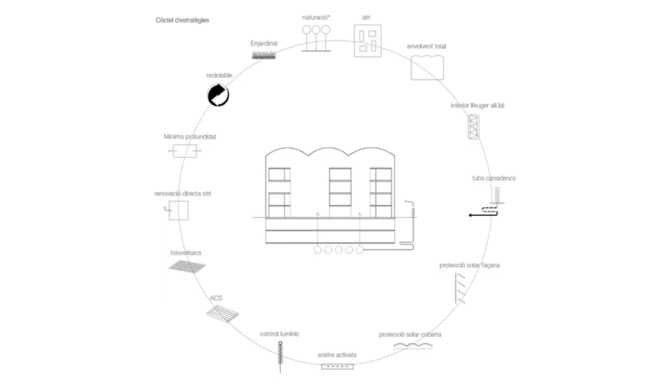Why were we lucky? Because the budget of our clients was too low. It was not enough to use efficient, sophisticated technological systems to provide sustainable and efficient comfort. Our fees were too low to get sophisticated simulations and develop sustainable strategies in our projects. So, thanks to that problem with money, the only way to develop sustainable strategies was by using specific architectonical strategy, by being more sustainable just through architecture, not by using machines or sophisticated systems or simulations.

Now, in the buildings we are trying to develop today, we really need simulation. But at that moment, the only way to be responsible in terms of sustainability was by using specific architectonical strategies. That's what we think has helped us arrive at this point, to understand the problems with a certain approach to architecture. I repeat, extraordinary examples, lots of them, but not with enough consciousness about how we have to be aware of natural and contextual conditions.

For example, strategies based on the use of the building. The first strategy in terms of sustainability is not about the object, what is more or less sustainable. What is more or less sustainable is how we use the object. In terms of architecture, that means understanding that not all spaces need the same temperature, the same level of comfort. Not all activities need the same kind of comfort conditions.

Of course, it was also at that time that we began to use thick materials, biospherical materials. That, again, is a completely specific architectonical decision. Or by introducing that kind of intermediate space that you know well, because our reference was basically French. That intermediate space is not only interesting in terms of passive strategies, but also in terms of how we use a house, a public facility, or a building.

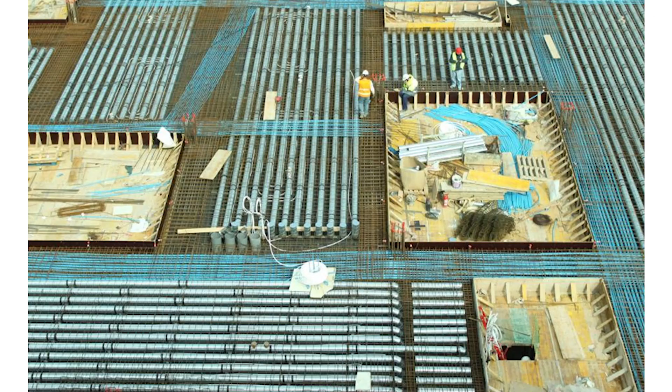And even when an active system is necessary, when we need a climate system to provide the extra comfort that passive strategies can't achieve, from that moment we've always been trying to put those systems into the most permanent part of architecture, which is the structure of the building. So even when the active system is necessary, we try to plug it into that specific and permanent part of the building.

So, in our history, let's say, this has been our process to understand that we need to recover that relation with nature, so that if it's not possible to come back to the pre-fossil fuel moment, maybe we can be at that ecotech stage we know, in order to be a little less in a moment of crisis with ecology.

And that idea is what we call reciprocal architecture. It means we try to provide not comfort, but to project the experience of people. We really believe this experience is far more intense, more convincing, more extraordinary when it's the result of collaboration between architectonical decisions and natural conditions. When your experience is the result of this combination, it suddenly becomes something extraordinary.

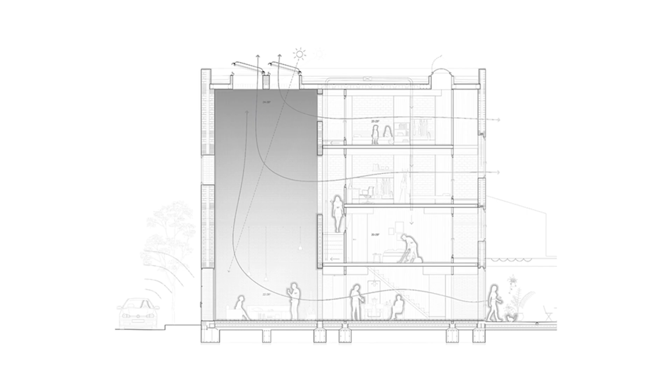So quite a simple thermodynamic concept, else. But from that point it becomes sometimes extraordinary, because it's in this convective space, this thermodynamical space, that combines not only the sun gains and the natural ventilation, but a lot of inertial mass, a lot of mass that helps. In Barcelona this is very clear. I suppose that in Marseille it's quite close.

When we live close to the sea, it's quite simple to explain that thermodynamical concept: the sea helps us make softer the difference between temperatures, summer and winter, night and day, because during summertime the energy of the sun is stored in the sea and comes back to the city during winter. That's a basic concept in Mediterranean climate that helps us a lot, and it's always in our projects.

Doesn't matter if it's a private house or a public building. This combination of huge wide walls with natural ventilation, convective and so on, produces something quite extraordinary, which is the sitting room of this house, the entrance, everything. In fact it's a non-programmed space. It works as a lobby, for parties, for everything.

Another reason for that section was that on the west side there was a very noisy street, lots of cars, so pollution. So the idea to get all the relation with the outside through the sky looked like a very good idea.

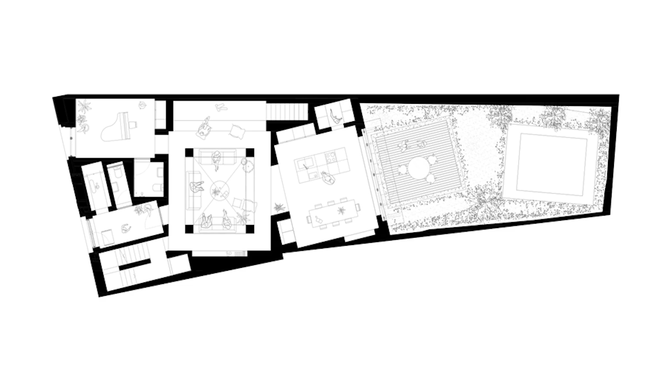Another example of that kind of thermodynamical convective space is this house we've just finished in the middle of Barcelona. I won't go deeper on that—it's just another example of that kind of non-programmed but quite extraordinary space that has these genetics.

It's the reason why the house performs like it performs, why the comfort is like it is, based in that kind of natural comfort. When we are in that kind of spaces, we have the sensation that they're more convincing, because all the attributes of the experience are placed in that very permanent part of architecture. It's something really common in all our projects, trying to put the maximum number of attributes into defining the whole idea of experience.

The really beautiful house is an example of the same idea: a very vertical space getting sun gains from the top and producing natural ventilation. But at the same time, what we're happy about is that the final result is something quite extraordinary in terms of living.

The porch is another example of that kind of thermodynamical space—a machine that works as a gallery in winter in order to get sun gain, and works as a pure porch, producing, promoting, and intensifying natural ventilation in summer. A house, in that case, for a rich guy who was able to accept that this house has no other sitting room than the porch.

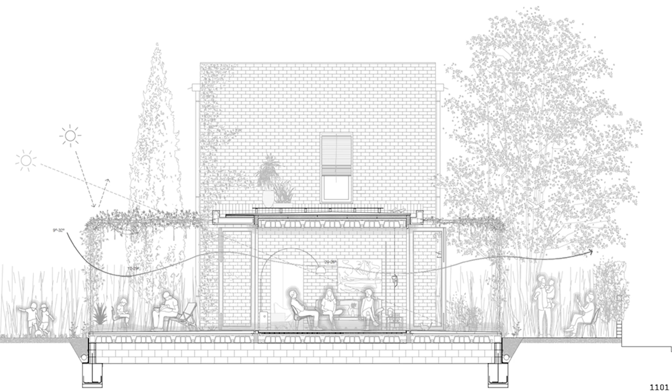The porch is completely open in summer, no TV, nothing else than this porch working as a passive space, completely closed in winter and completely open in summer. It's a beautiful strategy that puts in relation people, experience and context—quite clear in this case, with two gardens on both sides of the porch.

In this house the porch has become not only the sitting room but the whole daily program of the house—the kitchen, the sitting, the dinner, even the studio, even the laundry—surrounding the block of bedrooms, working as a porch that gets open in summer and closed in winter.

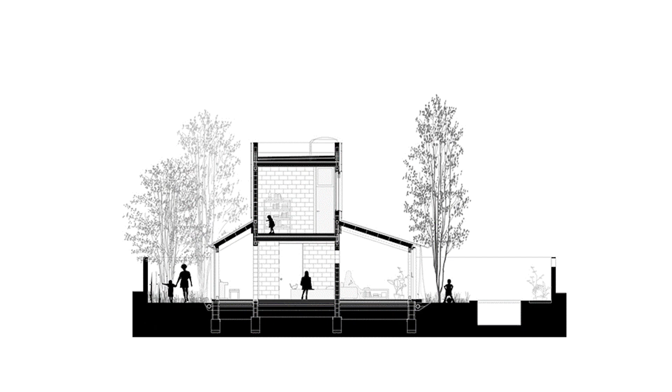Well, we're not ashamed to say that we copy everybody—Lina Bo Bardi, Lacaton Vassal, and others. We're quite proud about that.

Or in this case, this is an office building, but the whole pre-existing building works on the idea of managing the relation between human experience and outside conditions. The pre-existing factory was just improved to get more insulation, to control and introduce new systems of natural ventilation that can be managed and controlled.

From that basic, very simple approach, we defined a little better conditions in order to work in an office way. Because in a factory, that idea of factory-for-office space is quite sexy, since it's such a big, continuous space.

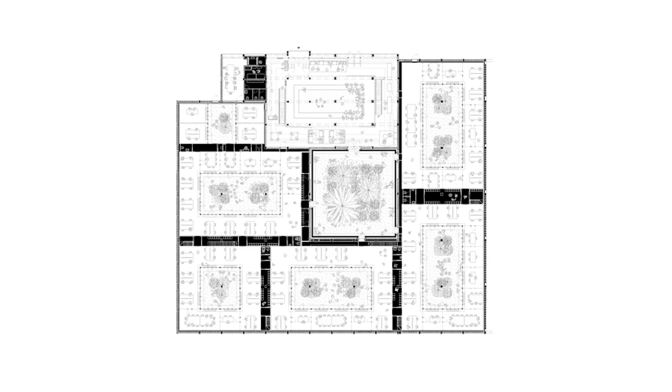The idea of a New York loft is so good that everybody thinks it's easy to put an office space into a factory. It's quite impossible, because the big difference between a factory and an office space is the lack of hierarchy in the factory. In a factory, nothing is organized, nothing is hierarchized, which is cool, incredibly nice. But when you try to put people working in departments with those kinds of synergies, the typical strategy of box-in-box shows up.

Here we tried to put clusters surrounding natural vegetation, where everybody can be a little bit better if necessary, but 75% of the hours of the year the office can be open because the passive conditions in the whole shell are quite good in order to work.

Reciprocal is about work to manage, to collaborate with natural conditions and physical phenomena. That kind of design leads to architectonical decisions in terms of geometry and material, dealing with and managing natural conditions, emphasizing, intensifying, and producing a comfortable experience for people.

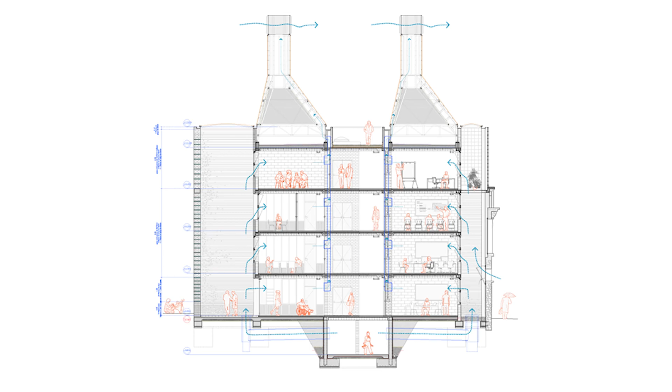Those natural chimneys are able to move 15,000 cubic meters of air per hour. That means the air in every room of the building can be renovated between 9 and 11 times per hour during summertime. Really interesting.

Those sun chimneys are a very interesting idea, especially in our climate, because those very tough thermodynamics that we use, based just on big walls and natural ventilation, when you have a program like this school, not just children but people together in a room...

you know that at least in winter, you don't need any artificial climate system because just 40 people together in a classroom is enough to provide the temperature. So in winter, you just have to manage the minimum renovation in order to not lose the heat you have. In summer it's the opposite.

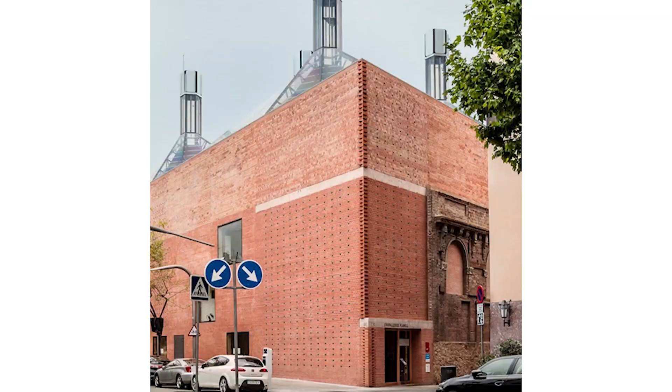You have to take off all the excess energy that people are producing, which the big walls aren't able to store enough. So the funny idea of the sun chimneys, based on the greenhouse effect, is that in winter they work really badly because the sun is lower, with fewer hours of sun. So the sun chimneys in winter hardly move the internal air 2-3 times per hour.

But in summer, in Barcelona, the sun chimneys reach 90 degrees inside because of the greenhouse effect. With 90 degrees, the air rises so fast that it has to be replaced by the inside air. So that idea, based on geometry and material, was the extra challenge of this building: not only to provide comfort through typical passive strategies, but also to move the air based on a natural engine.

Outside there's not only time, there's not only natural conditions and physical phenomena, there's also people, there's also traditions, there are resources, and we also want to give that conscious of context to people in our buildings.

We really believe that when you work in a vernacular context, like it is here, it's a beautiful old town called Ullastret in the Empordà, a beautiful area far away from Barcelona. To be in relation with that kind of heritage in terms of a small village is not just to look like the other buildings. It's to be honest, to look like you really are. Then you really are in synchronicity with what surrounds you.

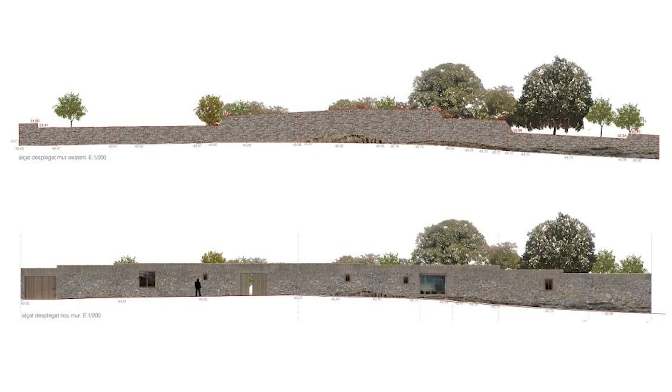For us, the proposal was so clear. We proposed this weekend house as just a large porch attached, linked to the former wall. Because in this village, the norms ask that the facades have to be stone look—we call it crocanti, stones placed one close to the other. So the idea was clear. The client was happy with that beautiful section, a continuous porch attached to the former wall.

But when we went to the council, we got a terrible surprise because the street was too narrow for the cars. It was on the council plan that this beautiful wall had to be demolished, because the street had to be a little bit wider and more comfortable for trucks turning on the corner and so on.

A terrible moment—we are all very intense in the office, so it happens once a week. Something bad really happened: the wall is going down, everything goes bad and so on.

But there's a beautiful sentence in Spanish, something like: after the bad comes the good—no hay mal que por bien no venga. That when something bad happens, after that, something good is coming.

After this really bad news, we came into that research process again, asking the same strategy in terms of heritage. The heritage here is quite nothing—it's just a wall, and after the decision of the council, it's not even a wall, it's just pure stones. So what we asked of this minimum heritage was whether some attributes still remained there in order to be reused, in order to be part of the new performance of the house.

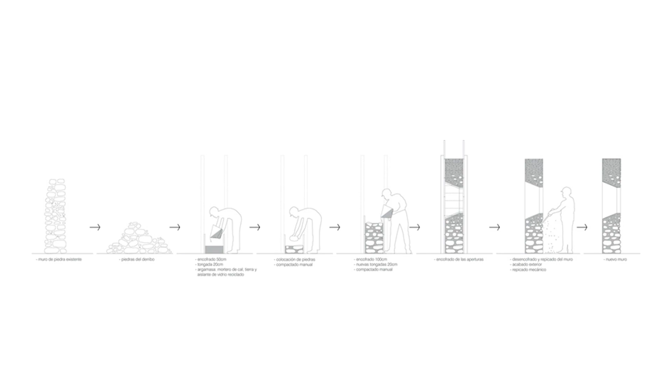So the beauty of the house is that we demolished the wall and we rebuilt the wall. It's just a one-layer house—the walls are just one section. There's no double layers, there's no insulation, there's nothing else than 60 centimeter wide walls. This is possible on that kind of generous plot, assuming huge walls.

So we rebuilt the wall with that traditional technique of rammed earth, but replacing the stones layer by layer—10 centimeter layers, 20 centimeter layers, it depends—reintroducing the walls with lime mortar, not cement mortar, combining the mortar with some of the soil of the plot to get some of the color of the plot. This is possible, I repeat, just in a weekend house.

We are at the edge of the norms, okay? As insulation is illegal, but as a research process it's quite interesting. So you get the insulation by introducing glass balls with insulated air inside. You put some air in the wall, and as the wall is so wide, you get enough insulation—the minimum per norm, okay.

And the final trick is that not all the walls work the same in terms of structure, not all the walls work the same in terms of insulation, so the combination of the mortars is different. The plan with that is the same original project—we didn't change it. It's the same continuous porch, like a domus Toscana, but instead of surrounding an atrium, it surrounds a garden.

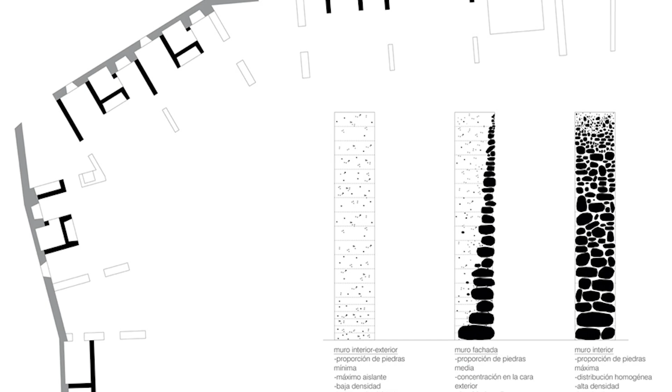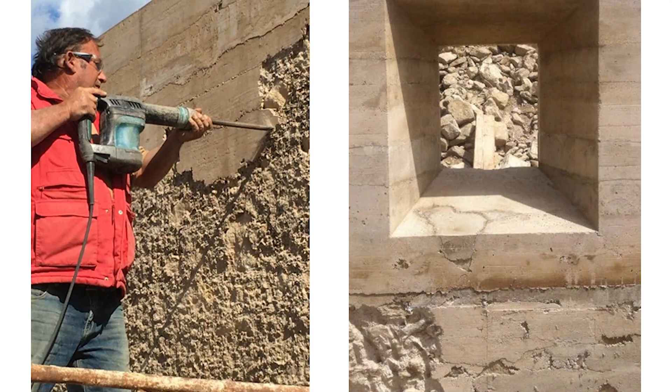It's a continuous series of equal spaces in a perfect section, very well orientated to the south. The good thing about the process is that at the end of construction, when you take off the precast system, we did a kind of digging to the hammer, in order to recover what is asked for per law. As an idea, it's quite beautiful to recover the look of the former stone that was there, 1.5 meters just in front.

So it's completely different from the rest of the houses, because the color of the mortar is not exactly the same, the density of the stone is not exactly the same, but it's completely vernacular. It's completely in fit with the context.

Why? Because the result is so consistent, so convincing, it's clear that it's a result of our research process, quite similar to the process that people did 200 years ago by producing that kind of construction. It's not to simulate, but to be the same — be the same in terms of process.

And this is also context. Context is not just natural conditions. Context is also raw material, techniques, stones. And I think it's important to understand, and you will agree, that we as architects don't experience spaces in a different way than the rest of human beings.

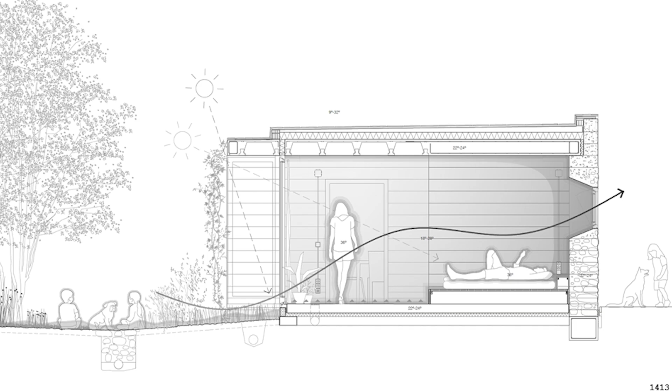It's quite funny, because there's a picture — on the opposite orientation of the house is a pure continuous porch, south orientated. So when they move out on Sunday, they come back to Barcelona and close all the windows. During the week there's enough hours of sun to produce the typical greenhouse effect, so when they come back on Friday in wintertime, the house is quite warm enough.

The funny part is that on Sunday afternoon, they have to move because the house begins to get a little bit cold, but it works in a very natural, comfortable way. In summer, it has to be completely open, especially at night, producing natural ventilation, because these wide, huge walls store the excess energy and need to be ventilated at night to take off this energy, especially at the hours when the outside temperature is better.

This is also something that is not finished, that we are building. In Palma de Mallorca it's a little bit the same story about the relation with — not the vernacular as a look, but the traditions or the context as social resources, material resources.

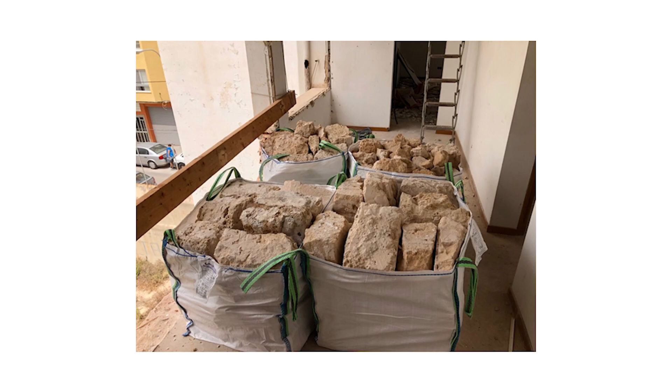So the funny idea here, we won this competition just by presenting an explanation of the process. They were clearly asking for CLT panel construction, timber, wood. They are looking for that because they are so conscious about climate, ecological crisis, and really concerned about it. They really want to use that kind of CLT products, but they don't have CLT produced on the island, so it has to come at least from the Basque Country.

So we presented a different idea, but it looked vernacular enough that they were interested. We won the competition with just a piece of paper with a couple of schemes, and an explanation of the process.

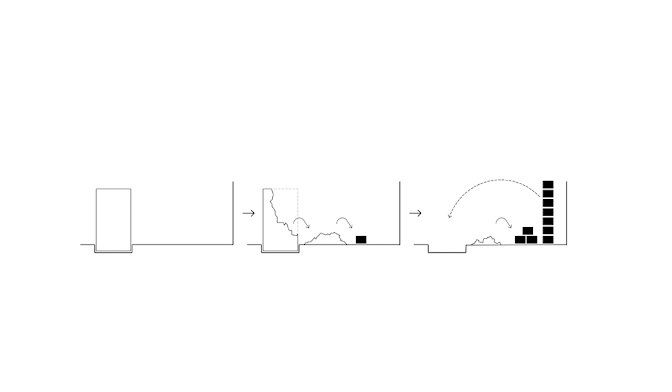In that case, we will demolish the building, and the same guy who demolished the building will build in the same plot that kind of huge blocks with the stone, because we come from the previous house, so we have that idea of massive elements working in pure compression. When you work with lime concrete, with lime mortars, you cannot put steel bars in it because it doesn't mix well. So the previous house has no steel bars inside, and neither does this one.

So we produce those huge blocks. The administration was so proud in the explanation of the competition that they want to use all the surface possible to be built on the field. They are so generous that you can use the excess surface for gardens or for whatever. And we decided to use that extra space into thermal mass, huge walls working in compression, a pure compression way, a little bit Egyptian.

And it works just by pure geometry in section. The CLT panels are here, and the wall comes from 80 centimeters, 70 centimeters, 60 centimeters, 50 centimeters, 40 centimeters. Every layer, just by pure geometry, the CLT panels get support without making any bolted link.

Wow, it's a lot of stuff. Sorry, I'm coming in deep into the project.

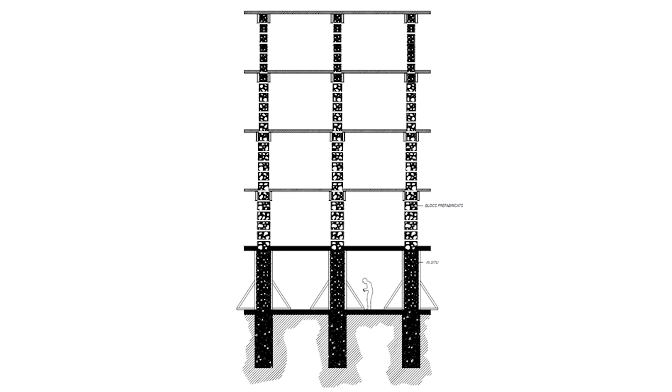But the other discovery we made is that we were not so happy with the first testing process, because when you get that beautiful marès stone, but you precast the block, when you take it out of the casting system, what you just see is the mortar, like in concrete. The concrete surface is beautiful, but the stone has disappeared.

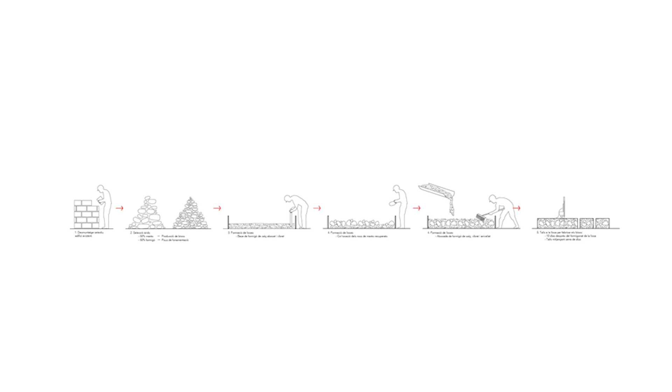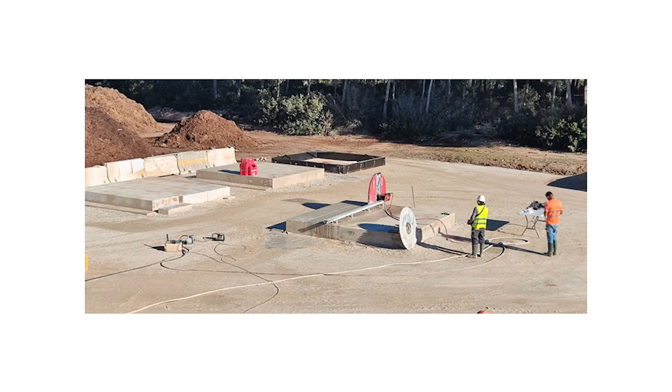So, also for economical reasons, we developed this process, which is like a swimming pool. We changed the strategy of construction and moved the whole process to the plot of the guy who did the demolition, producing a kind of 4x4 meter swimming pool casting system.

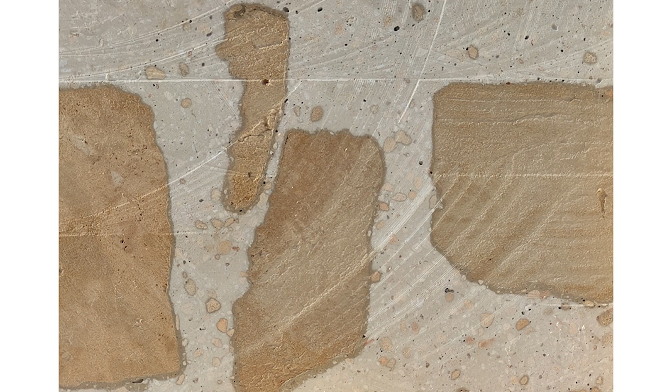We place the stones again, like in the previous house. We put the mortar, the lime mortar. We made those huge stones, and then by using quarry machines like the Sierra, we get that beautiful turrón de Jijona -- you know what turrón is? It's a dessert, a Spanish dessert. And you get not only the stone, not only the limestone, but also the cut of the machine.

We are happy that now we don't have to explain that this is just for ecological reasons -- it is about having that kind of natural comfort based on inertia, based on mass, based on those very specific materials, natural cross ventilation. But the beautiful thing is that the experience is far better because of that.

It's not the end of the strategy -- the strategy is based on that, but what is amazing is to recover not only that natural comfort, but also to see the stone, to see the process, to see the cutting mark over the block.

So that's the storage of the blocks, and this is the construction process. Now we are placing the CLT panels. Now the windows are already there, but okay.

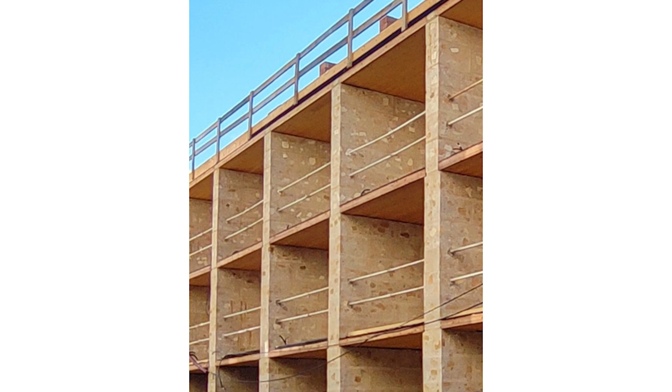Well, I've been talking a lot about thermodynamics, but a lot of students are here. Now we as citizens, especially young people but also others, we have to be really aware — not only about the ecological crisis, but also about social justice. These are the two big subjects that, at least in my classroom, are always the worries of the students, not only the ecological but the social. I have to say that as a citizen I'm also interested in that, but as architects we have to ask ourselves how we deal with both.

With the ecological, I've been explaining all this time, up to the thermodynamics and so on. But in terms of social, I think the architect's basic role in dealing with social responsibility is by defining new typologies. The typology is the tool that we have as architects to define relations between people.

It's about social, okay? This is dwelling for young people, this is social housing. And basically it is interesting for something not because of the shape of the volumes, not because of the facade, but because of the typology.

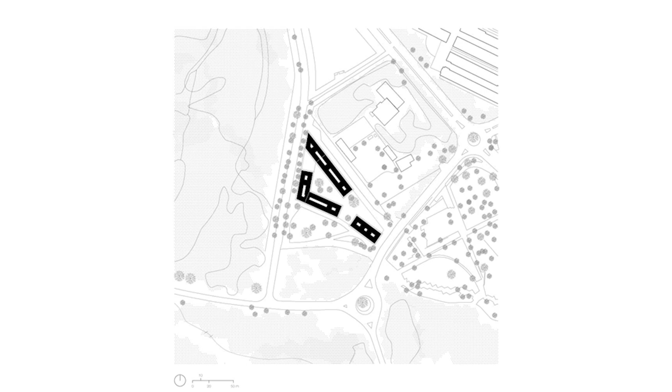When we do a competition, the first thing we always do is see the difference, the gap, between the maximum surface you get if you multiply the plan for the number of floors, and the maximum surface the council allows you to build. That's hardly ever the same. In this case, if you just multiply the plan of the building by the number of floors, it was like 16,000 square meters, but the council's maximum surface is 13,000 square meters. It's quite common, and the larger the gap, the more architectural decision there is.

Up to defining that, you have to decide where you put the difference, where you put the gap. In this competition, the rest of the team decided — and it was a good decision — that the shape of the volumes given by the urban plan was really beautiful, and true. So they decided not to do this L-shape to divide it, or maybe make that corner shorter, or make the width of the bar a little different, and have confidence in the beauty of the final result of the volumes defined by the urban plan.

Our decision was not like that. Our decision, coming from everything I've been explaining before, was that it was clear to us that we need that natural element to promote natural ventilation. So instead of changing the shape of the blocks, we put this continuous patio courtyard in the middle of the blocks as a prior strategy, knowing that thanks to that, all the apartments, all the housing, will have cross ventilation.

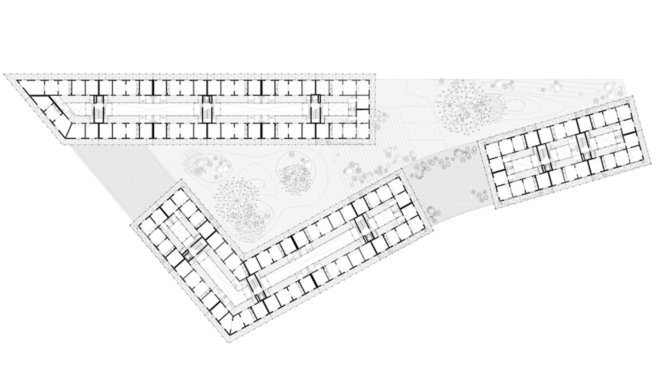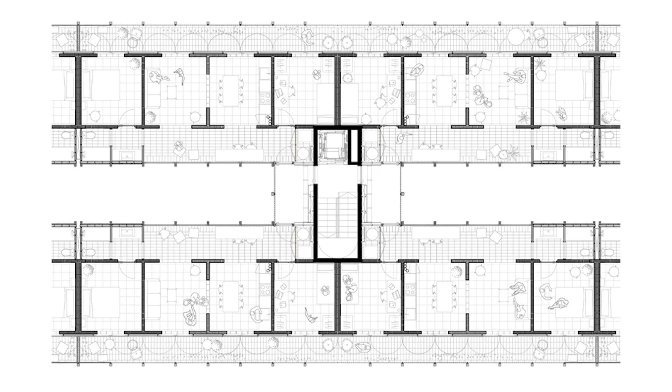With this beautiful solution, when you're working with social housing, it's a good strategy to use the minimum number of staircases possible because elevators are expensive, maintenance of elevators is expensive, and so on. So it's really efficient to use one staircase for four apartments. But that means the worst typology in the world, because when you have just one staircase, you're coming into the typology through the corner. That means you need a large corridor to reach all the bedrooms.

But thanks to the first strategy of the central courtyard, the worst space of the house becomes the best. Giving that corridor 180 centimeters of width, it can be worked as a studio, a storage, or extra seating, and then that corridor becomes a gallery, with all the bedrooms getting cross ventilation through the gallery and the continuous patio.

Well, I'm coming to the end. Last experience. Too much?

Just as a final note, we never explain projects - it's not a tradition, not something we've agreed between the partners, but we hardly ever explain projects. We always try to explain buildings that are already built, that can be checked and reviewed, that we are proud to explain because we've been there. In general, we're also proud to say that the users invite us for dinner, so we get the vital experience of being there after construction. That's why we never explain projects.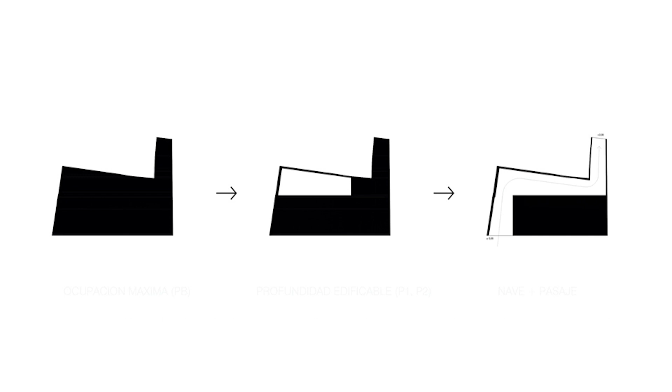The client, the Swiss guy, decided to do the same - to develop the winery not in the landscape, but in the middle of town, right in front of the church. So he bought like 5 attached houses, and this is the plot we received. This decision - it wasn't our decision.

This is a very basic strategy, not really sophisticated. We made this decision because we have to be part of the neighborhood. So we decided to make a big difference between the producing part of the process - not the engines, but the vats - the vatting room and the cellar are in that Euclidean volume, and the rest, the gap between that Euclidean geometry and the attached partition walls with the neighbors, is what can be called the social and logistic space. The wine business needs more of that social dimension every day - selling, experience. So that experience dimension is based on the snake-like path that surrounds the vatting room.

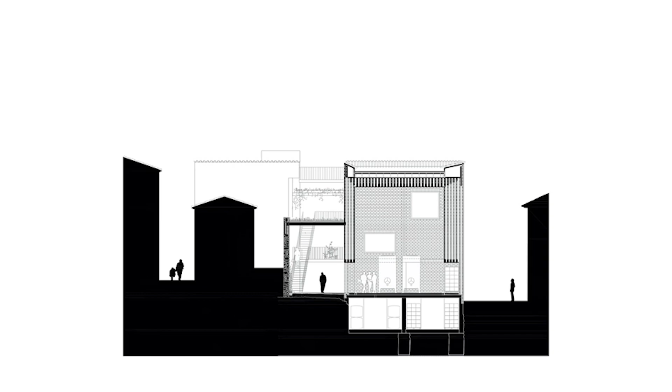This is a very easy section. Just the vatting room with the cellar on the right side, and that intermediate space is just roof, not closed, completely open, natural ventilation, for the logistics moments of bottling, when the grapes arrive in September. So it's a very simple strategy in terms of program and urban decisions. You see that we are just close to the church.

Here you've seen that we do a lot of brick building. We always love to show the bricks as they are, and here we tried again. But per norms, the council asked for the facades to be plastered with the same color as the traditional construction. We presented to the council beautiful renders with a quite yellow brick, and the council admitted the image. They accepted that for once we would be allowed to do a building just with pure bricks because the color was quite close. But what we love is the red brick.

Now, 'la cabra tira al monte' is another thing - you always go to what you really like. So we forgot that we had an agreement with the council, and we did our building with the red, beautiful brick that we love. But at the end of the process, one day the mayor of the council came into the building and he was completely, really mad because of the color of the building. Really mad - it was close to a physical moment.

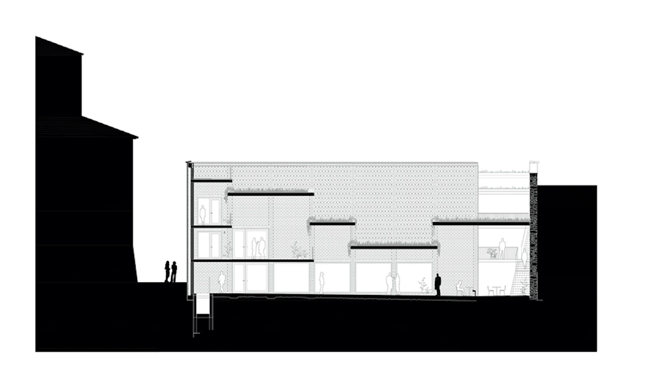So this is the social space. In fact, there's no other staircase - everything is out of the producing space. Even the stairs are surrounding that space. You see that the stairs to go to the office or to the tasting room are on this surrounding space with the red brick. Here it was possible to remain with the red brick.

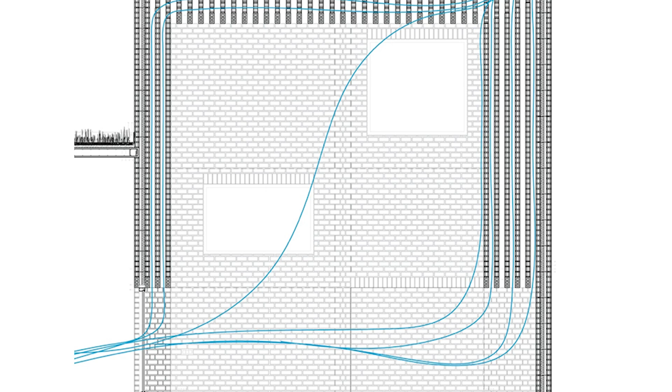But what's interesting about this building, and that's why I like to finish with this again, is coming back to the beginning, to the thermodynamics, in order to produce an extraordinary experience - an extraordinary experience for wine, but also when you come inside that building in the middle of July, 40 degrees outside, and you come here and you have the feeling of 21, 22 degrees, like something interesting is happening. Just based on pure passive strategy.

The interesting thing about the building is that we have placed those enormous walls with a lot of material, a lot of heavy bricks, to introduce all that mass that helps us make the temperature more continuous and soft. But when you work with that kind of thermodynamics that need combination with ventilation, the more surface you have, the better you can take off the excess of energy. The walls during the day are keeping the energy; at night you have to take it off thanks to the natural ventilation. So the more surface for the wind touching the walls, the easier you can take off all that heat.

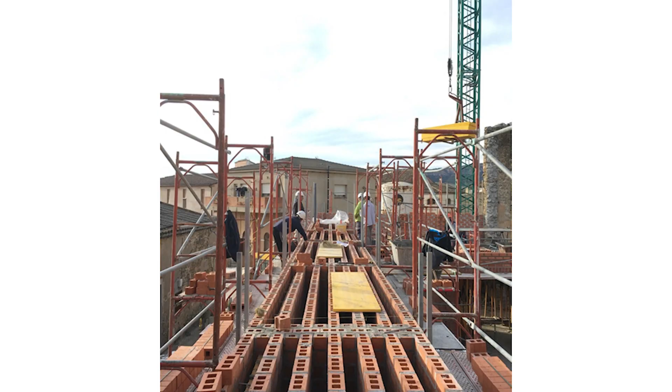That's why those walls are not just a desire of an architect. Our architecture is not conventional, but it's not just original to be different from the rest - it's always based on really clear strategies, decisions and research. So that's why it's a multi-layer wall, not to look better in a section, but to have a lot of surface, thanks to natural ventilation, to take off excess energy. It's all done with the same brick, and there's the multi-layers - the same brick placed as the structural wall, and this one works like a huge beam from one wall to the other, producing that chamber for ventilation.

And producing this beautiful space for the vatting room, you can see here where the air goes up and also can cross through the roof, because the beams of the roof also have holes, because of the bricks, that let the ventilation cross also the top of the structure.

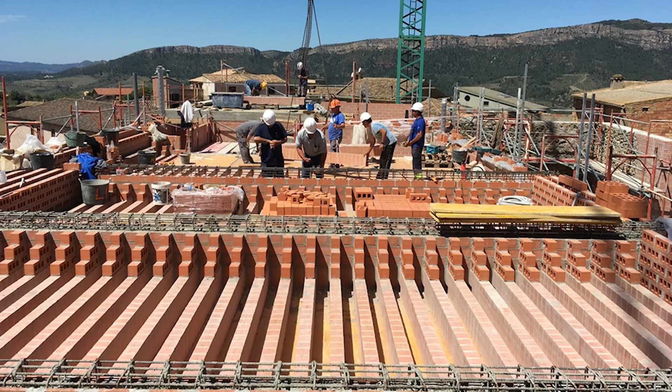In natural conditions, basic thermodynamics means that with wind... the big challenge of this building was that we committed to the owner to keep this building between 21 and 24 degrees the whole year, for the producing of wine. That strategy worked, more or less, but we were a little bit over, 25 or 26 in summertime. So here there's a final research element, which is quite interesting because it's working.

It's the final element that produces that very strong sensation when you come inside on a hot summer day. We placed a small swimming pool on top of the building, because at night we lose energy facing a bigger mass than ourselves. The infinite amount of mass is the sky, so we lose far more energy to the sky than to a neighbor, for instance. That's why people use hats, and why in Morocco people sleep on the roof in summer, because you're cooler if you're losing energy facing the sky. So we placed that small amount of water on top of the roof to give back energy to the sky during the night.

So even in summertime, the water gets really cold. During the day, we put the water 20 centimeters below, refreshing the structure and producing something completely amazing: we reversed the typical convective movement. The air goes up, but when it touches the structure at the very hot moment of the day... you have to keep closed, because if you open your windows at midday in summer, the air that comes in is hot. So you open a lot at night, but during the day it's better to stay closed. Thanks to this, even at the toughest moment, we reverse the movement of the air - it goes up and comes back down because it gets so cold when it touches the structure.